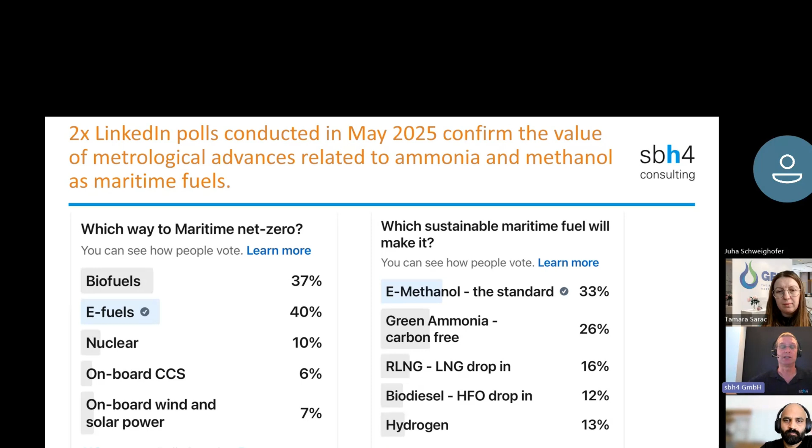And you can see across the various different characteristics why certain fuels might be more or less attractive than others. For example, I think we all know this, unfortunately, ammonia suffers a little bit from the issues related to toxicity. Hydrogen gas suffers massively from the very, very low volumetric energy density. In an aeroplane, what you want to worry about is the gravimetric energy density of the fuel plus its container. On a ship, or in a shoreside terminal, what's much more important is the volumetric energy density.

And this is really one of the unbeatable characteristics of liquid hydrocarbon fuels. Look at the energy density up here, and we might say similar for heavy fuel oil. It's just completely and utterly unbeatable, which is, of course, why we've used HFO as a fuel on ships so much in the past. And trying to say, okay, well, let's use something else, it's really only LNG that has a similar energy density, but then the problem obviously becomes cryogenic storage.

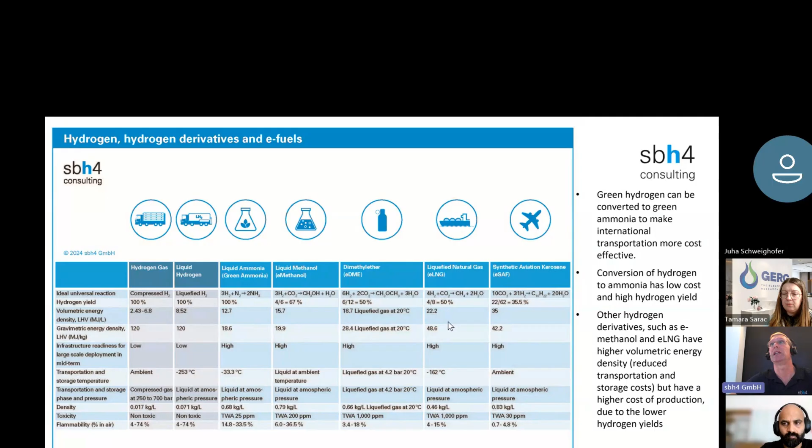Good. So let's take a look. Let's pick one of those off the list and start somewhere. Let's start with ammonia. I do believe that there will be a future for ammonia as a maritime fuel. That's a personal belief. I think it will be limited to heavily industrial applications because of its toxicity.

I think there's also a huge challenge to overcome with the seamen's union, because these are the people working on board the ship and down in the engine room who are most likely to be impacted by any toxic leaks. So it's not a slam dunk that ammonia as a maritime fuel will make it, in my opinion, but it does stand a high chance in some applications, especially industrial maritime applications. And that's where we're seeing it penetrating today: the large iron ore carriers, for example, moving between Australia and China.

But once we start saying ammonia as a maritime fuel, we need to think, okay, am I going to burn it on a gas turbine? Gas turbines sometimes operate on very modern ships, often military ships moving very fast. Is it going to be burnt on a two-stroke engine, a bit like a heavy fuel or diesel engine as we operate today? Or is it going to be used on a fuel cell?

And the quality requirements of the ammonia as a fuel differ significantly between those different applications. So the metrology and measurement requirements of those three different energy release forms will also differ significantly. Furthermore, the emissions profile from those different energy release forms also differ significantly.

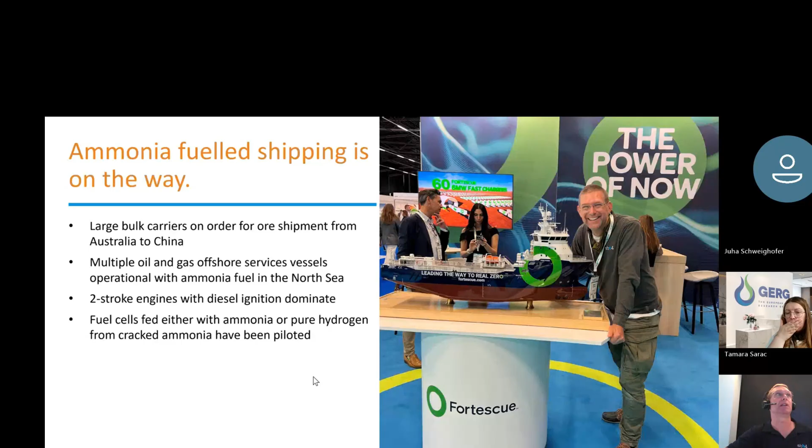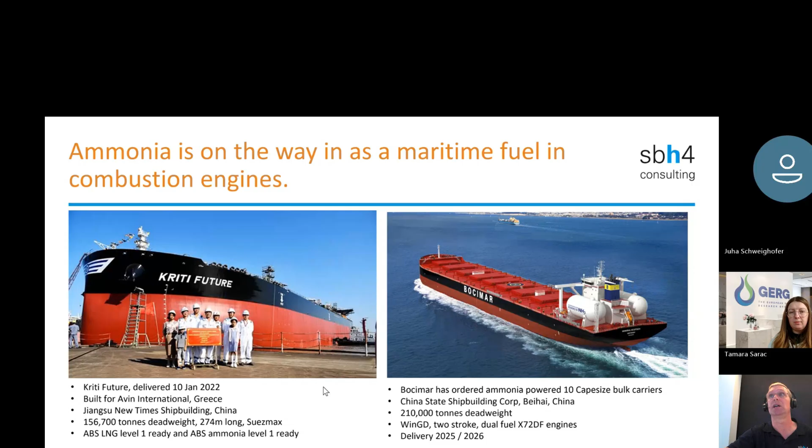So yes, we are seeing specifically bulk carriers and large petroleum refined products tankers, crude oil tankers moving towards ammonia-fired engines with a few vessels on order. In terms of how we use ammonia on a two-stroke engine, well, inevitably it will need a pilot fuel such as diesel, because the ammonia has such a high ignition energy. It just doesn't want to burn, is the truth of it. It burns with a lazy flame and it doesn't want to burn. So we need to ignite or detonate with diesel.

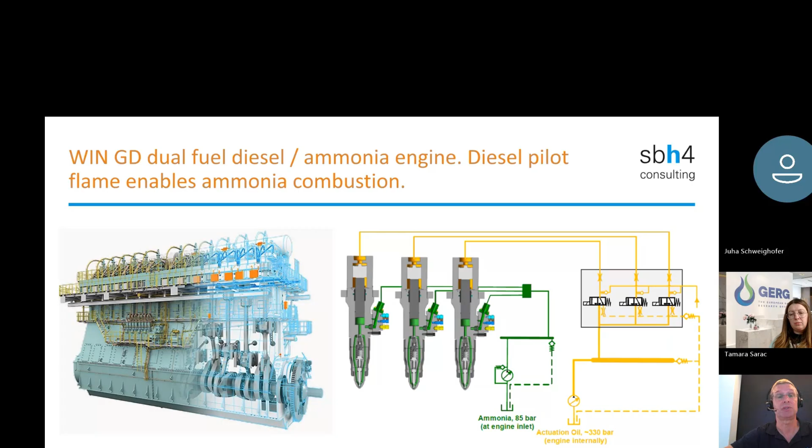And ultimately, in terms of the overall energy requirement, we're typically using about 5% diesel and 95% ammonia. And again, people need to be aware of this, that ammonia on a two-stroke engine is not a carbon-free fuel. It is 95% carbon-free because it needs to be mixed with diesel. And therefore also the emissions footprint and what you'll need to measure is a combination of the ammonia combustion and also a small amount of diesel.

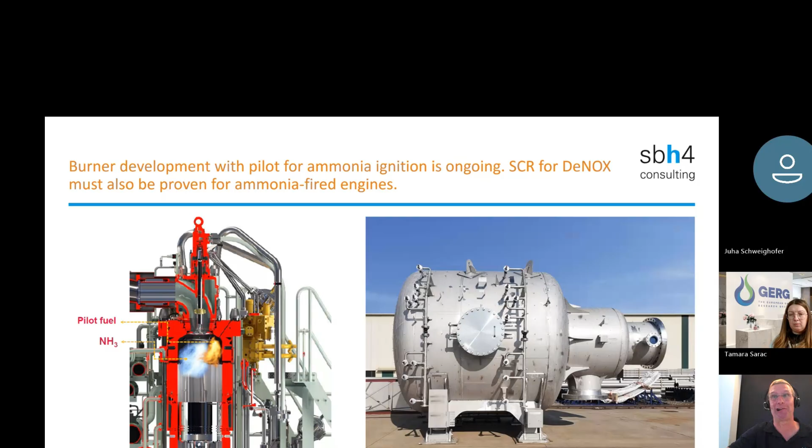Mitigation in terms of scale and size, I mean, this is an SCR, a selective catalytic reduction unit from a maritime vessel. So, when we talk about scale and size of operations and emissions mitigation, let's not forget some of these big ships burn a lot of fuel and potentially create a lot of NOx emissions which need to be mitigated. Just wanted to throw that one in for you there. We're not talking about small DeNOx systems that you might put on the back end of a car or a truck. These are monsters.

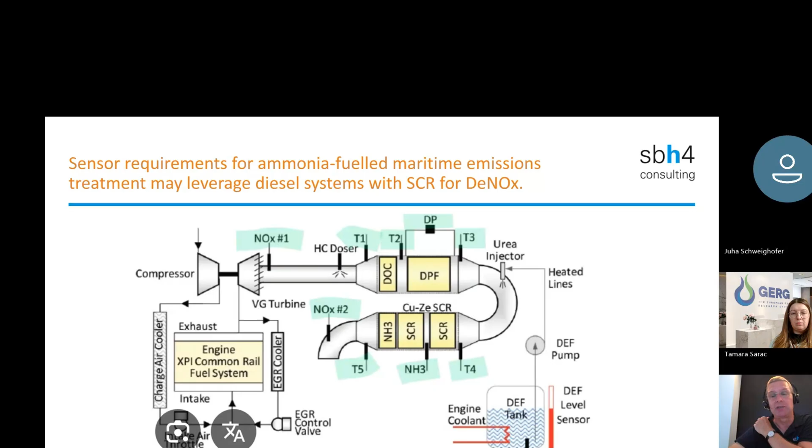But talking about car and truck, I think we can lean on what has been done in cars and trucks with regard to ammonia emissions monitoring and process control and sensors to imagine how the world of maritime ammonia use might evolve. And here's really just a reminder that a truck ammonia DeNOx system based on diesel fuel is full of sensors. And in a large-scale environment, some of those sensors would need to be replaced with more accurate gas analyzers for emissions monitoring. So there's a lot of work to be done, a lot of metrology to be done around process control, feedstock purity measurement, which we don't measure in the truck, and also the emissions monitoring.

Good. Let's stay with ammonia, and I'm now going to go through to look at cracked and partially cracked ammonia as a maritime fuel. What do we mean by cracked ammonia? Well, a lot of the time when people talk about ammonia cracking, they're talking about very, very large port-side crackers. So moving large quantities of ammonia around the world from where it's cheap to make it to where it needs to be used in large quantities and cracked back to hydrogen and then perhaps put into a hydrogen pipeline.

And on the left, we've got there a very, very large ammonia storage tank and the kinds of ships that will move large cargoes of ammonia around the world. And on the right, you've got two models of ammonia cracking. One here, a centralized model where it's cracked centrally and then perhaps the hydrogen is distributed. And a second model where the ammonia itself is distributed and then cracked, let's say, at the point of use.

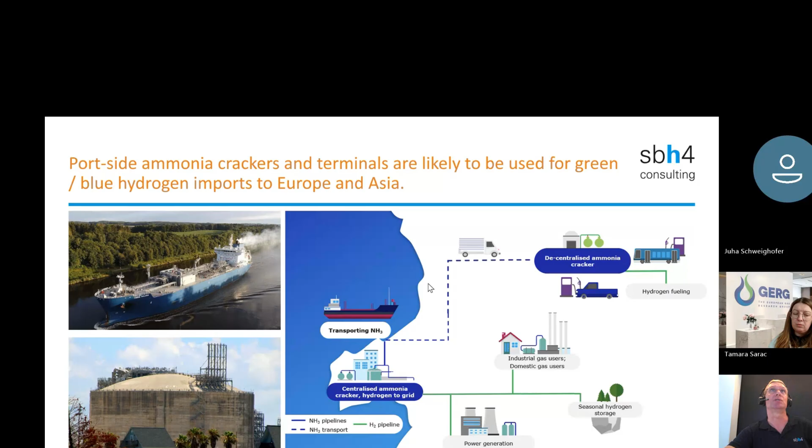Either at a chemicals plant where they want to burn the hydrogen or a chemicals plant where they want to use the hydrogen, or on board a vehicle. I don't actually ever see that it's going to go on board buses. I'll be very, very clear. I also don't see that it's ever going to go into cars, but it could easily go into other vehicles and industrial applications.

So what does an ammonia cracker look like? Well, they're all different, to be very honest. This is a particular example from Johnson Matthey. So I suppose this is going to be Honeywell UOP in the near future, if you've been following the news. But basically, the heat for the cracking is provided in this particular configuration by burning some of the ammonia. There are other configurations where the ammonia is cracked, and then some of the hydrogen at the back end is used to create the heat inside.

But whether we're burning the ammonia or the hydrogen to create the heat, again, we have lots of metrological requirements simply for ammonia cracking. Because this cracker burns a lot of material to create the heat, we have a lot of flue gas emissions, so we have an emissions monitoring responsibility. And of course, there will be process control sensors and analyzers within the process to make sure that the cracking is happening well, that we've not got a lot of ammonia slip coming through the cracker, and various other key process parameters.

Furthermore, the ammonia coming into the cracker is of critical importance because the cracker contains a catalyst which is very, very sensitive to certain poisons. So it will also be necessary up front of the cracker to be measuring for certain impurities such as sulfur compounds, which shouldn't be in the ammonia, but they might have entered the system through some failure upstream. So on the inlet, process control, emissions monitoring, and the hydrogen coming out, there are metrological requirements throughout the ammonia cracking process. Some related to quality control, some to process control, some to environmental emissions monitoring.

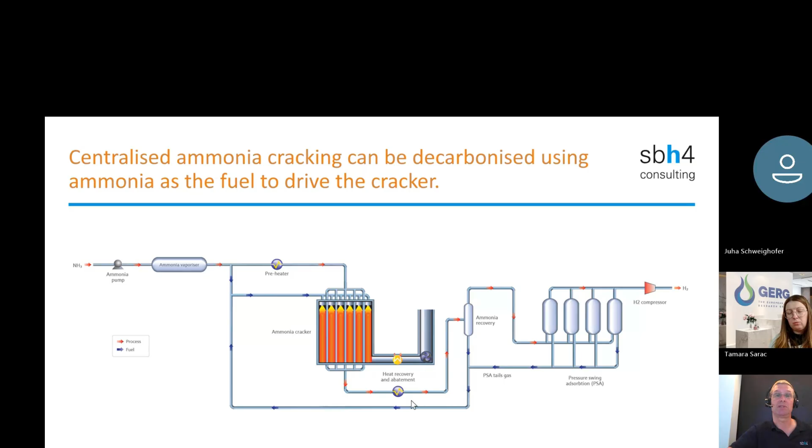If we then think about ammonia cracking on board the ship or inside a truck or a train, it's very similar technology at much smaller scale. So this is an example of a maritime two-stroke engine proposal, where we have our cracker here. And you might notice that this is partial cracking. A lot of the ammonia bypasses the cracker and goes directly into the engine, and typically 10, 20, 30% of the ammonia would be cracked. But clearly, if we're just burning the raw ammonia, we would have the emissions issues we discussed previously. If I'm cracking 10 or 20% of the ammonia, I have additional process control sensors and measurement requirements inside the cracking loop as well. Plus, don't forget that the ammonia can actually be going into the exhaust to provide deNOx afterwards.

This is an example actually from an aviation turbine, but I would just remind you that some very fast ships actually run gas turbines instead of two-stroke engines. It's less common, but especially in military, defense applications, high-speed ships, it is actually quite common to be running a gas turbine. So we might actually see ammonia going onto gas turbines on board ship.

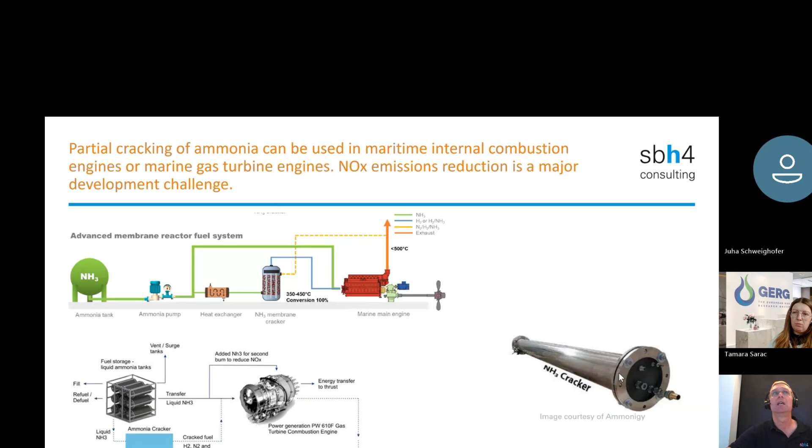At these smaller scales, it could be quite large if it's a ship, but this cracker here has come straight out of a train where ammonia is being cracked to go onto a diesel locomotive engine. This is effectively what a small scale cracker could and would look like. This particular one is from a German company called Ammonigy. I don't know if there's anybody from Ammonigy on the call today, and if you are, hello. And really just to give you an idea of physical dimensions.

We can also go a little bit further. We can crack the ammonia and then put it onto a fuel cell. This is not internal combustion. This is now a fuel cell, whether it's a high temperature fuel cell, solid oxide, high temperature PEM, or low temperature PEM. But I really just want to point out that if we're coming away from a two-stroke engine or a gas turbine with those particular combustion profiles into a fuel cell type operation, whether we crack or not, we're going to have a very different purity requirement coming into the fuel cell and a very different emissions footprint coming out of the fuel cell.

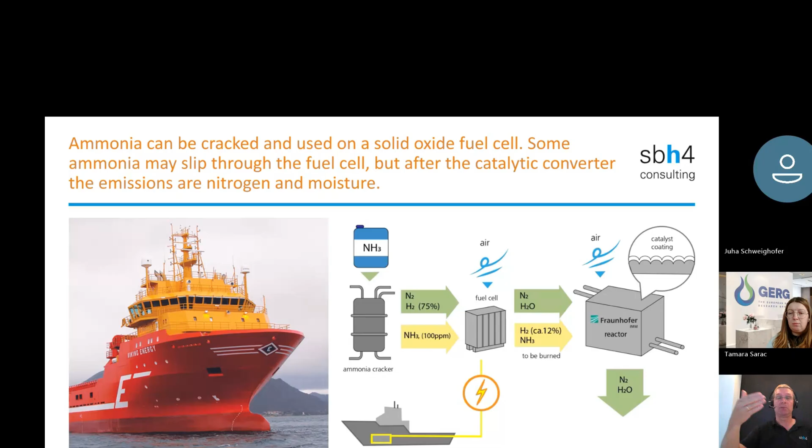Repeating what I said earlier on, it's not just the use of ammonia as a fuel that you need to consider for your metrological requirements. It's that matrix of which fuel and which, let's say, powertrain system, turbine, two-stroke, fuel cell, and even within fuel cells, there are all sorts of different dimensions.

And even within PEM fuel cells, you've got high temperature and low temperature with very, very different tolerances to impurities. So the metrological requirements or the purity measurement requirements coming into the fuel cell for PEM is a very high hydrogen purity. Coming into a high temperature fuel cell, much more relaxed. So again, even there, coming into a PEM fuel cell, there are two different types with two very, very different requirements on hydrogen purity coming into them.

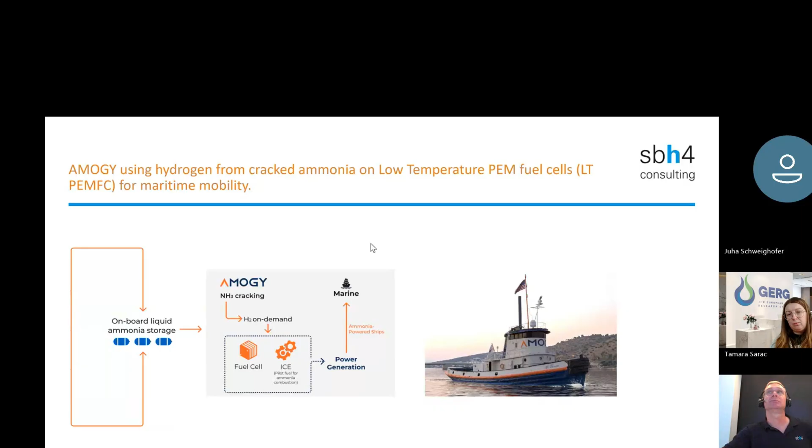This is another onboard case. Actually, the ship wasn't powered by ammonia. This small utilities power generation system at the back was powered by ammonia. This is an H2SITE ammonia cracker with integrated hydrogen membrane.

But again, these kinds of systems, what's going to make it through to the end game, I think, is still very, very much open. But the more you understand about the types of systems that are being researched and proposed, the more relevant your research and metrological work that you're doing will become ready for the future and be much more future-proof.

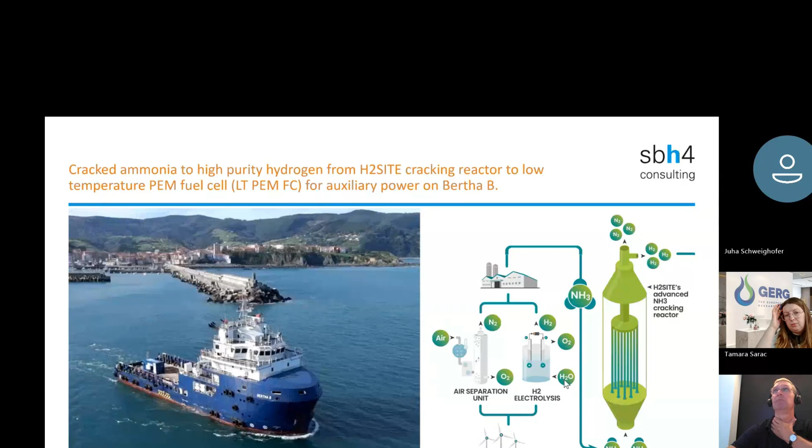Here's again ammonia fuel cell systems. Whether or not you know it, there are 8 of these vessels that were ordered for a Norwegian company, and they're being built in Vietnam. So, if people ask you, was that Fortescue Green Pioneer ship the first ammonia-powered ship? The answer is no. They might tell you it is, but it's not, and it wasn't.

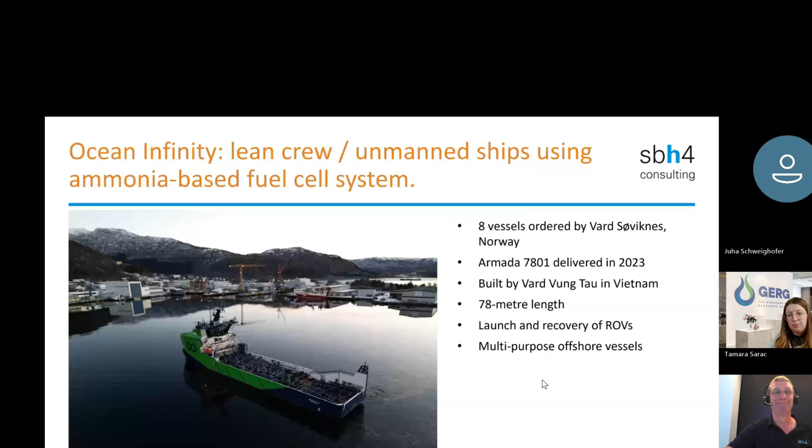Good. Ammonia for power generation. So we're coming away from maritime applications now. We're staying with ammonia, but we're looking basically at power generation on land. Clearly, I think we're all quite aware, we need to, in the future, over time, burn less coal, burn less heavy fuel oil for power generation, move much more through to a renewable world.

And the difficulty being, coal-fired power generation, base load, relatively easy to manage supply and demand. Renewables, typically non-programmable and variable. So as we move through to a higher percentage of renewables in the grid, what we need to also add on is, let's say, power or energy storage that complements the duration of intermittence or variability.

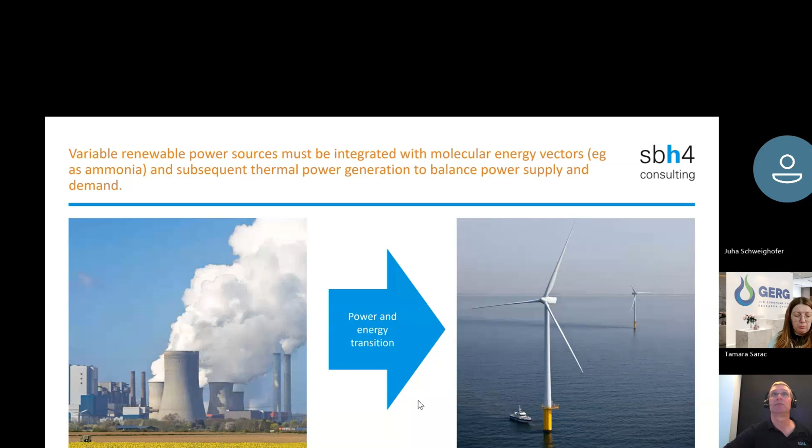And when we think about electricity storage or energy storage, we really need to think about the storage capacity. How much are we trying to store? And also the discharge duration. Am I trying to discharge over a second, a minute, an hour, a day, week, month, or am I trying to get seasonal balancing? And there's a lot of technologies for short timescales, small amounts, and a lithium-ion battery is fantastic, really good technology, very, very high round-trip efficiency. If we want to discharge for, let's say, 4 to 6 hours, brilliant.

But if we want to store energy for a week, a month, or a year, then lithium-ion batteries are just absolutely useless. The business case completely and utterly fails. And we need really to think about molecular energy storage. So I talk here about underground hydrogen storage, underground gas storage, or we talk about conversion of the hydrogen to, let's say, ammonia or methanol.

My point here being, when people talk about battery energy storage and say, well, that's going to be the thing, I'm kind of going, it's going to be one of the things. Yes, and it is brilliant. Round trip efficiency, unbeatable. But if we want longer discharge periods, we really do need to think about molecular energy storage.

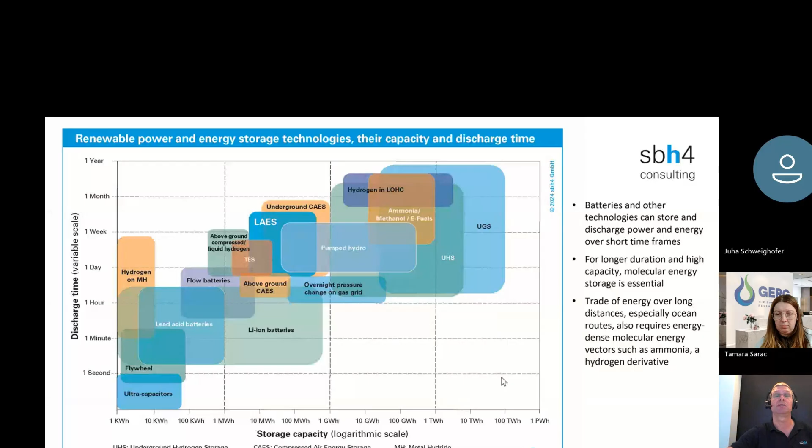So I've just seen a question come into the chat. Hi, sbh4. My name's Steve, by the way. Have you taken LCA of different fuel pathways into account? Only blue-green makes business case. Okay. Have I taken LCA into account? I'm not presenting LCAs today. And you're expressing an opinion there, I believe. Only blue-green ammonia and MeOH makes business sense. If that's your opinion, that's absolutely great. Lovely to hear it. Thank you. Again, also, I'm not presenting business cases today. But thank you for the comments.

Here's a study that was done specifically for the UK. It was a General Electric and an IHI study. I mean, GE do turbines and IHI do burners. And this was really comparing liquid hydrogen versus ammonia supply chains, portside power generation, right? So this is a little bit similar to that cracking case that we looked at previously.

The message of this particular study was that liquid hydrogen is less economically sensible or less economically viable than ammonia. Okay, so again, if you're trying to justify why you're looking at ammonia emissions and not other emissions cases in your metrological projects, here's one good reference point to establish that.

Again, I'm going to go through these slides very, very quickly. You don't need to sort of try and understand all of the numbers that are on these particular slides. You've got the slide decks, and also if you look here, the links through to the more detailed studies and analysis. So you can do a lot of research after the call today.

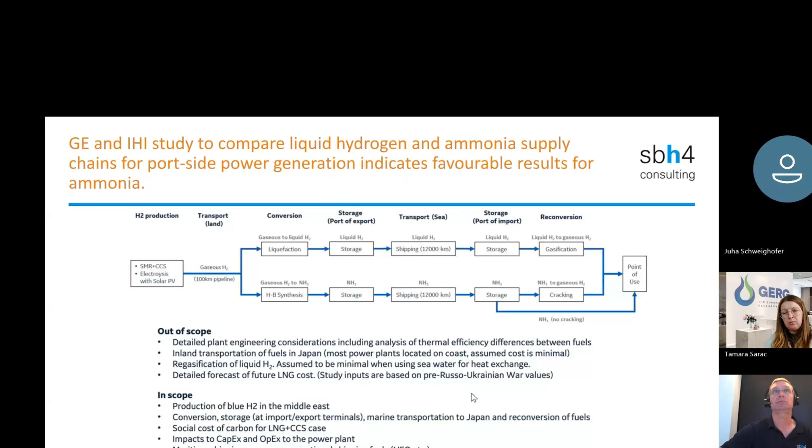When we think about the efficiency of ammonia-fired power generation, I think the benchmark is really going to be natural gas, so natural gas combined cycle, where we basically use the natural gas through a turbine to generate power. Then the steam that we generate is also going through a second steam turbine, so we get 2 hits of it, right? So we can get really, really high efficiencies on a combined cycle. If we go open cycle, we just get the first half. If we go combined cycle, we get the second half as well.

And if that's the benchmark, because that's what we're doing today, natural gas, the question really is going to be, can ammonia deliver anything similar? And the answer is yes, we can get similar, in the sense that natural gas combined cycle sort of efficiency typically plateaus out around 58%, and we can perhaps get as close as 55%, 56% using an ammonia fueled combined cycle, right?

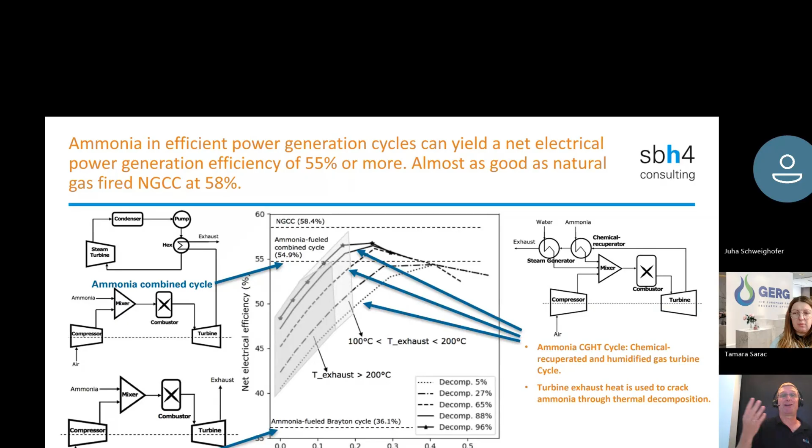So if anybody's asking, can ammonia ever get close to natural gas in terms of process efficiency? I would say yes, we can get close to it with an intelligent cycle. And if you're running, let's say, natural gas open cycle, then we can beat that dramatically with ammonia on a combined cycle. So yeah, it really depends on the cycle efficiency.

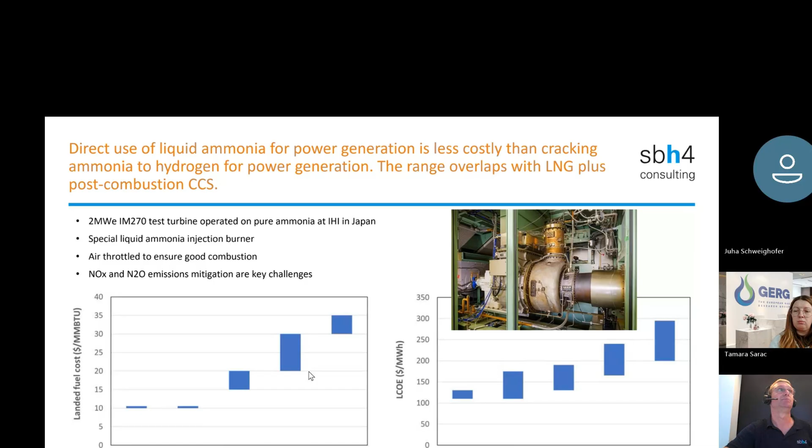I also ran a poll on my LinkedIn profile related to ammonia to power recently, and basically asked the question, will it ever be used? And if it is, how will it be used? And you can see the answers here, and yeah, there's a slight majority of people saying no, it won't, because of various different reasons. Either it's too expensive or the NOx emissions can't be resolved.

But a good number of people basically saying yes, it will, and broad consensus that it would potentially be used on turbines and gensets. So gensets is basically 2-stroke engines. So again, these kinds of information I think can be quite relevant for you to think about what kind of metrological projects you take forward. I've got another.

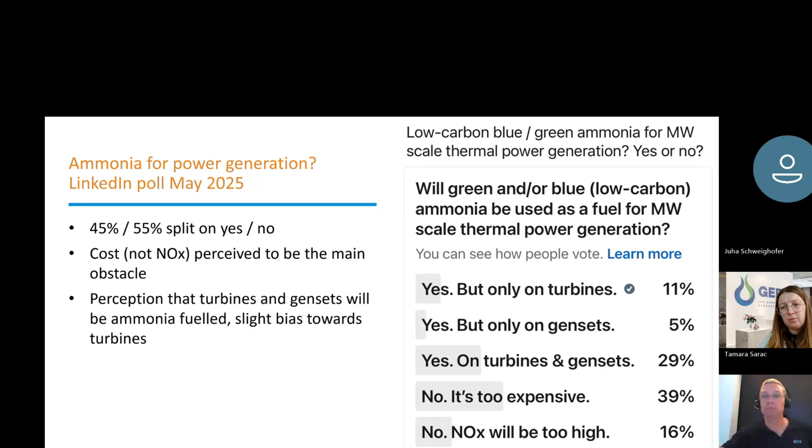Good. So that was basically ammonia for power generation. And I'm quickly going to look at some of these slides related to co-firing, because we don't need to fire pure ammonia. There were a lot of studies done in Japan, basically co-firing ammonia with diesel on a microgas turbine, and you can see here some of the results there. My point very simply being, we go ammonia plus diesel, integrated fuel use, a bit like the diesel pilot on the ammonia 2-stroke engine on the ship.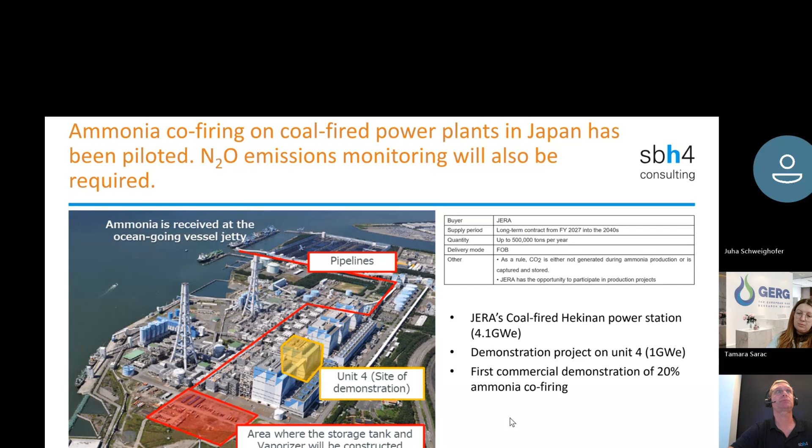And again, exactly how you take your studies and evaluations forward, I think, is really going to depend on where and in which parts of the world you believe these various different combustion ideas will prevail. In terms of doing that ammonia co-firing, a lot of changes needed to be made to the burners. Nothing else really was changed, but specifically the burners inside the combustion chamber to allow the ammonia co-firing.

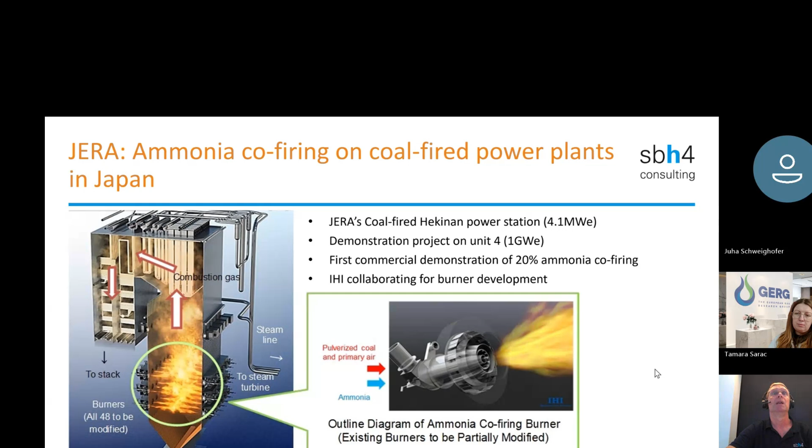All right, so I've got another question here from Florian. Hello, Florian. Could you please elaborate on the topic of NOx? Okay, good. Let's take a look at NOx, right?

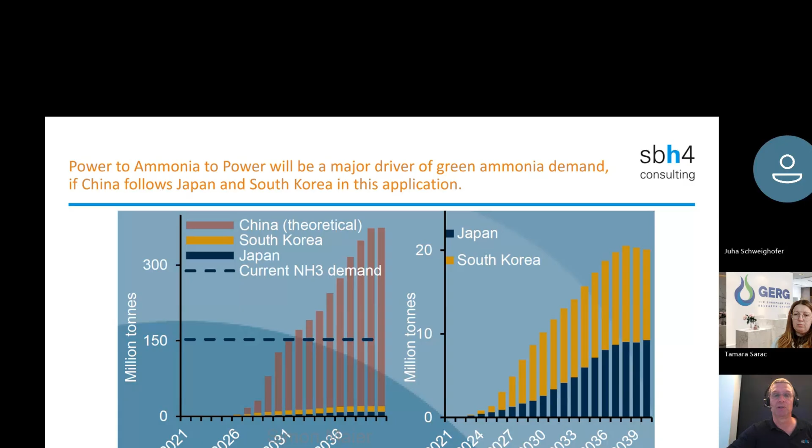Again, I'm going to go more into NOx on turbines rather than NOx on diesel. But ultimately, you'll still need to do DeNOx if you're firing ammonia, just like you need to do DeNOx if you're firing diesel. The good news about DeNOx with ammonia firing is you've already got ammonia on board to do the SCR.

All right, let's take a little bit of a deep dive into our emissions monitoring. We're probably not going to have much time to look at methanol today. Poor old methanol, a bit unfair, but I just really want to give you a flavor of some of the information that I've got in the deck here. Let's go straight through into the emissions monitoring now.

And I think for me, the difference between the future and the past, when we start burning ammonia as a fuel, is in the past, we've often worried about NO and NO2, fine and fair, and we've bundled it together as NOx. And I think that's going to have to continue. No way that's going to stop. My concern is that, if we're not careful, we're also going to get N2O coming through, nitrous oxide.

And if the whole reason for displacing a hydrocarbon fossil fuel with ammonia is to reduce greenhouse gas emissions and reduce CO2 emissions, if we substitute those for nitrous oxide emissions, then we've lost. Because nitrous oxide is around about 250 times more potent as a greenhouse gas than CO2 per kilogram, right? So if we end up with an ammonia-based combustion system with a lot of N2O emissions in it, we've lost, okay?

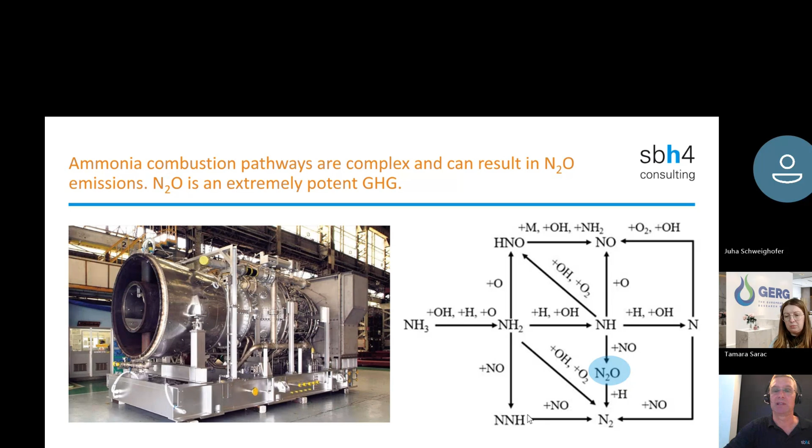And N2O, why would we end up with N2O? Well, basically, if there's not enough oxygen there, is fundamentally the answer. As soon as the oxygen comes there, then we can go through to higher oxides of nitrogen. But these reaction kinetics are pretty much instantaneous. These things don't happen slowly. This is all happening instantaneously within the combustion chamber.

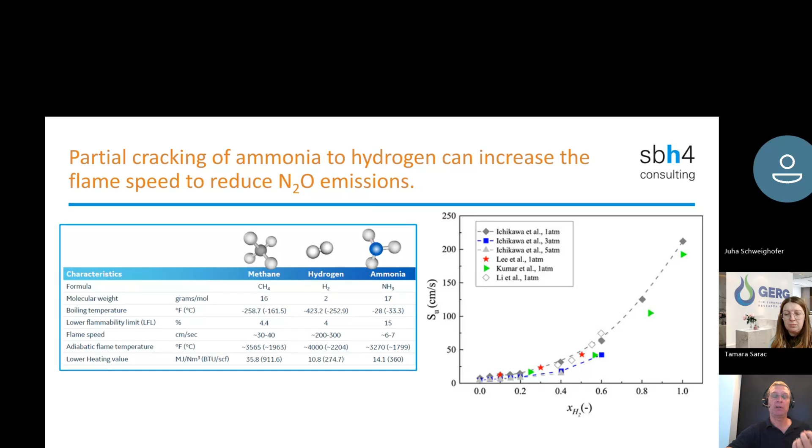And we can see, through various different studies, and again, please download some of these references, if we partially crack the ammonia, then we end up basically with a flame speed and flame characteristics that look a lot more like methane. So by partially cracking the ammonia, we can basically create combustion conditions that are much more similar to what we know a lot about methane or LNG.

And what people have realized is that, people sometimes call it lambda, or the reciprocal of lambda is the fuel air equivalence ratio, or phi. Is this phi? I'm not very good at my Greek characters. But basically, if we want to get the N2O down, and please remember this is nitrous oxide now, N2O, not total NOx, not NO, and not NO2, but specifically N2O, then we need to be working in a relatively tight band of lambda, of the fuel-air or the fuel-oxygen ratio.

And what that says to you is a couple of things. Number one, we can avoid, to a large extent, N2O emissions. Good news. We also need to control the engine combustion, the fuel-air mixture, in a relatively tight band, which means that the sensors and the metrological requirements to achieve that need to be pretty good. Rapid response, pretty accurate. So again, in terms of the metrological requirements, you're beginning immediately to see what kind of process control sensors the engine would need.

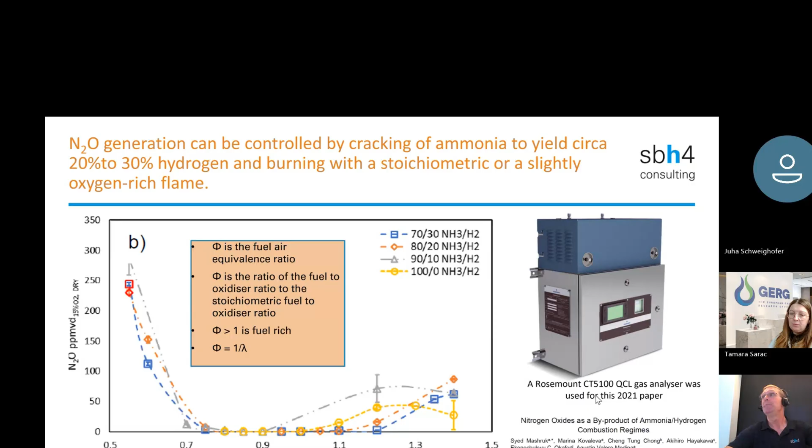And at the back end of the system, we're probably already measuring NO and NO2, combined NOx, on a chemiluminescence analyzer, great. Who's going to measure the N2O to make sure that that is not coming through as well? That's going to need different emissions monitoring and measurement sensors and technology. So, what have people used in the past? Well, QCL, quantum cascade lasers, you people would know all about this much better than I do. But that's what was actually used in this particular paper to measure the N2O.

And then we say, all right, so where in the past have we actually looked for N2O measurements and international standards? There are some industries where the N2O emissions are incredibly high, typically making nitric acid fertilizer, for example, where we burn ammonia intentionally to make oxides of nitrogen. I don't actually really know whether those measurement protocols are going to be relevant to emissions monitoring because the nitrous oxide concentrations are so much different. But I'm sure you also know the CO2 and N2O peaks broadly overlap in the IR spectrum.

I'm trying to tell you things in a very naive way that I'm sure you know a lot about. But I'm really just trying to make the point, can we leverage existing metrological standards from other sectors into what we're trying to do with N2O emissions monitoring? I don't know. Do we understand some of the problems with regard to CO2 and nitrous oxide peaks overlapping, which is very relevant? We've got a blended hydrocarbon fuel plus the ammonia. How can we deal with those? How can we learn from the past to accelerate an effective system for the future? That's what I'm trying to get through to you here.

So I can see another question coming through. Tobias Eriksson, hello Tobias. "Hi Stephen, do you have any slide about analyzers for ammonia slip and nitrous oxide?" Okay, good. Let's keep going and let's see if we do.

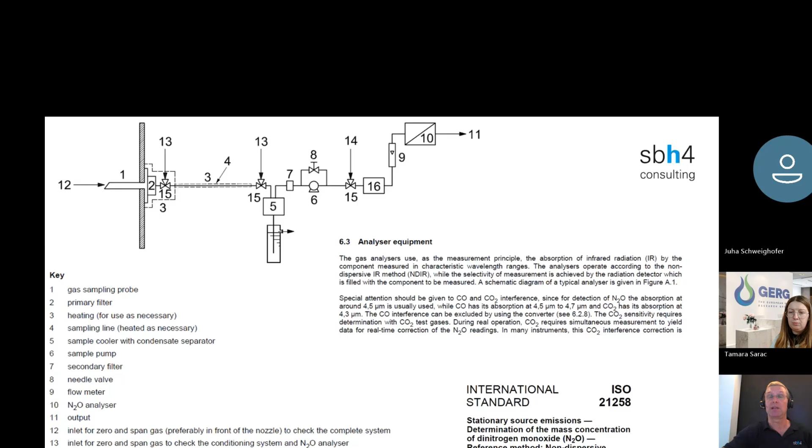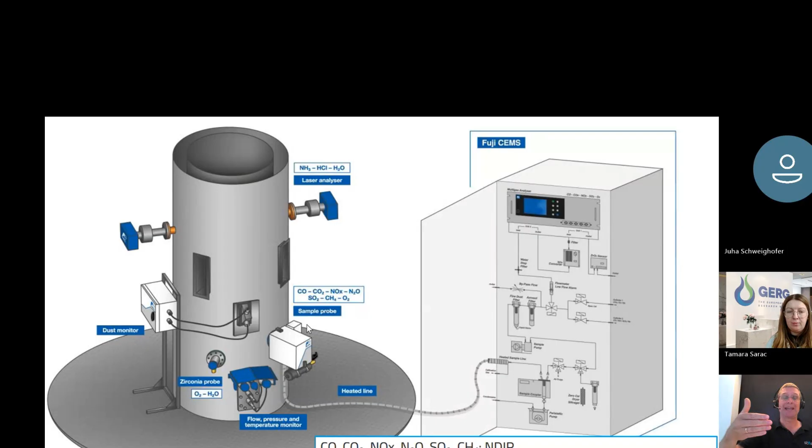So again, I'm really addressing the point of N2O here because I believe that most people are quite familiar with how to measure NO and NO2. You've seen the quantum cascade laser. Here's another slide, which is basically looking at a Fuji CEMS using NDIR, non-dispersive infrared, I think I said that right, to look at the N2O and also the NOx separately, different IR spectra, and also how you compensate for the CO2 peak overlapping with the N2O peak needs to be dealt with. This is a classical flue gas emissions monitoring setup, but I think certain aspects of this can come directly into maritime emissions monitoring.

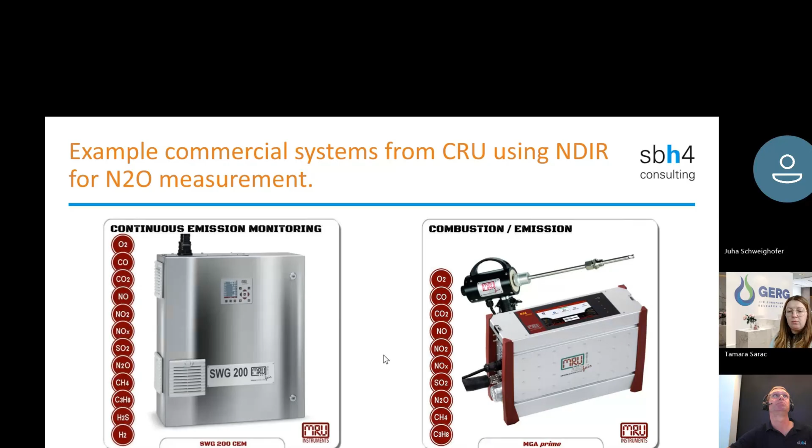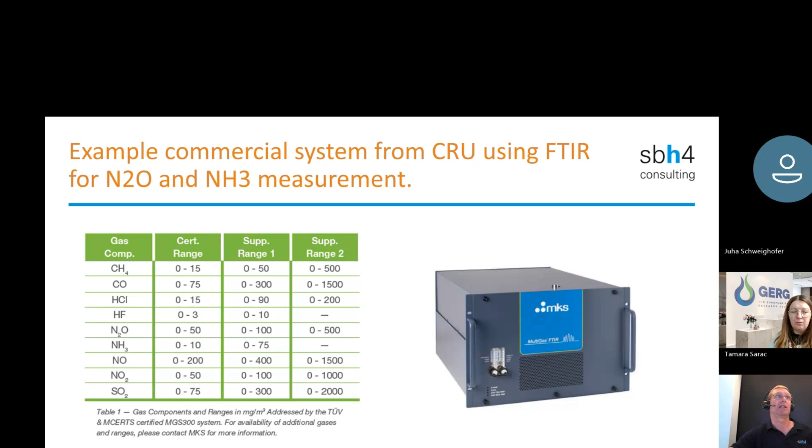N2O on FTIR, again, FTIR, whether it's going to survive on a ship, I'm not entirely sure. Ships tend to be high vibration, very, very unstable environments. FTIR really works incredibly well in the lab, but whether or not for validating certain standards FTIR would be a good case would really be the kinds of things that people like you should be trying to decide upon and make recommendations to the world about. But again, FTIR can be used very, very effectively, specifically for N2O and ammonia measurement.

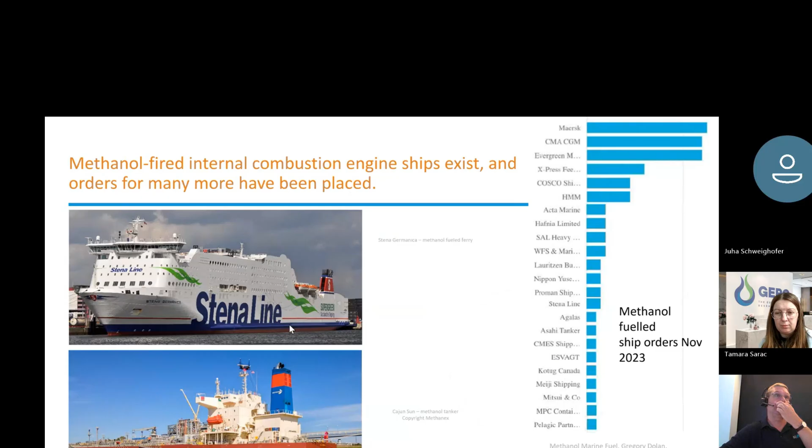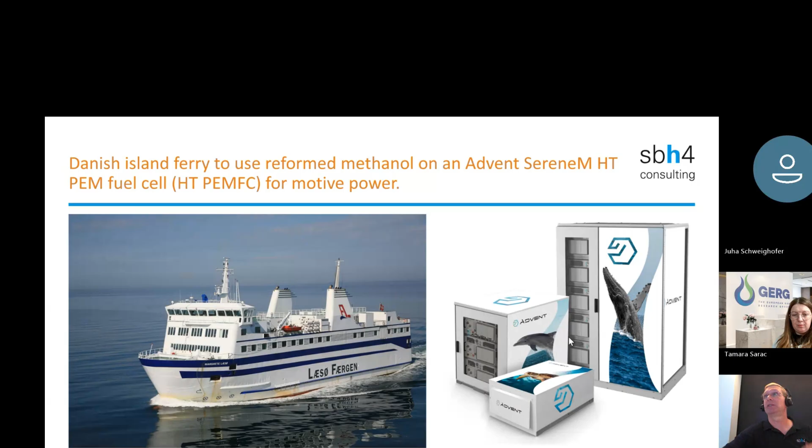And again, these examples here are methanol basically on a two-stroke engine, like a diesel engine. This example here is slightly different. This is methanol being cracked and then going into a high temperature PEM fuel cell. Now, high temperature PEM, as I mentioned before, is much more resilient to, let's say, impurities or non-hydrogen species coming into the fuel cell. Advent and others make HT-PEM fuel cells.

Come away from maritime and talk about methanol on land for power generation. A lot of studies were done about 20 years ago related to the use of methanol for power generation, because the idea was to go from natural gas to methanol and then burn the methanol. When people realized that LNG could do the job for them, the case for methanol decreased. When the gas crude price spread moved in favor of crude, again, the need for this particular technology decreased. But there has been a lot of work done and forgotten about methanol for power generation.

And again, you can go through some of these older research papers and learn a lot about it to understand what the emissions footprint would be, what the efficiencies would be, whether or not it ever stands a chance of coming back into the world and displacing or competing with ammonia, with renewables, with anything else that you might choose to mention.

Okay, there's some really, really useful input from Marcus Haas. Thank you very much indeed for that insight, Marcus, and I hope everybody's got their eyes on the chat. Endress+Hauser, SICK GmbH, has a class-approved analyzer to measure N2O and ammonia as well. Okay, fantastic. That's exactly the kind of information that's really, really good to get you sharing amongst yourselves. Thank you for that input, Marcus.

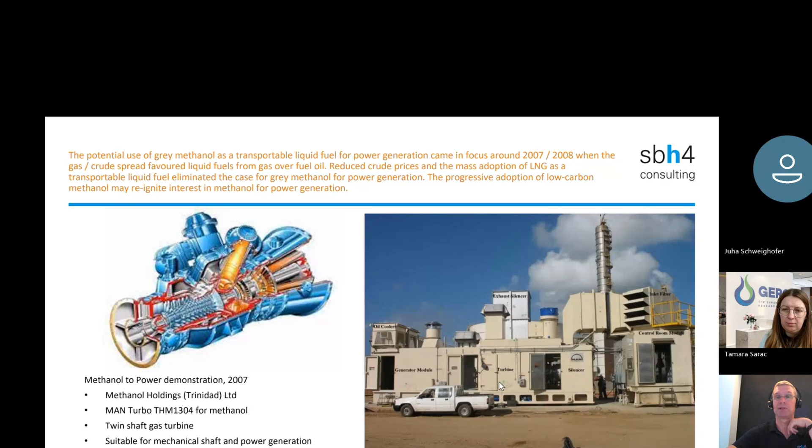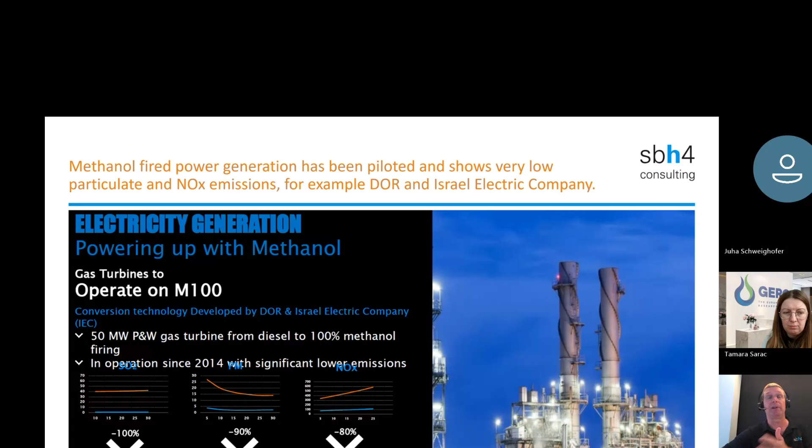Here's another case study. This is firing methanol on what I refer to as a gas turbine, or a two-stroke type engine, with a lot of benefits in terms of reduced particulate emissions, reduced NOx. This was done by Dor in Israel. But really, if you read this kind of information, you'd go, why would I use anything other than methanol? So please again, look at what's been done, look at some of these references that I'm giving you to leverage the past in terms of directing your research in the future.

Coming back to fuel cells, this is a direct methanol fuel cell, DMFC, very suitable at very small scale. It begins to get uneconomical at larger scale because you need so many precious metals in the membrane. If you go larger scale, you really want to put hydrogen onto your fuel cell. If you stay small scale, then you can go direct methanol. But again, something like this, you'd want to be able to measure the purity of the methanol. So you'd want to validate the purity of the methanol through the supply chain.

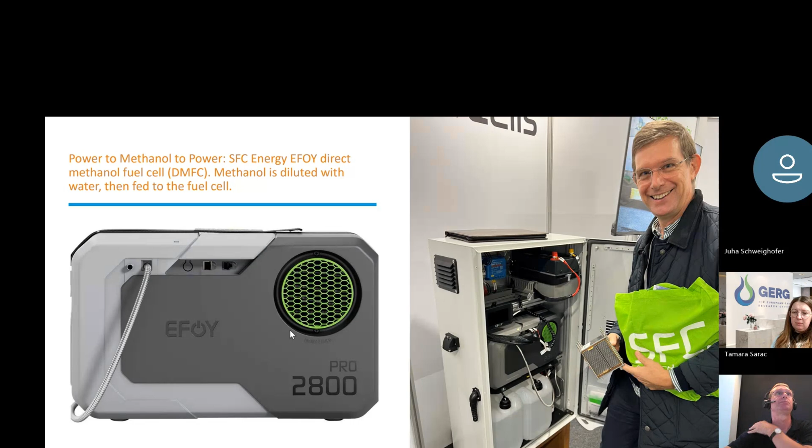Emissions profile coming off something like this, relatively benign, you would hope. But I'm really just wanting to underline what I said before. It's not just about the fuels, it's also about the powertrain. And that's really going to determine the metrological requirements coming into and out of the system. Siqens, this is again high temperature PEM, similar to what we looked at for Advent. Again, much more tolerant of impurities coming into the fuel cell.

Let's go upstream now. We've talked a lot about utilization of methanol or ammonia, so how it's burnt or used on board a ship or on land to make power. Let's go upstream and ask ourselves, what about the metrological requirements as these new fuels are being made? We're making e-methanol, synthetic methanol from green electricity, in Kasso in Denmark today. This photograph is about a year old from when the site was under construction. These are the Siemens Silyzer PEM electrolyzers in these various houses here. This facility is now up and running.

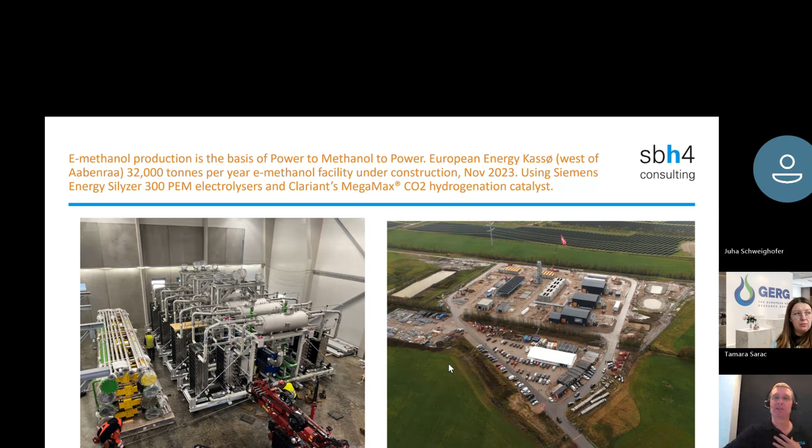So as you build a new methanol production facility such as this, of course, there are process control requirements on site to make sure that the process is well managed, the product quality is under control, and if there are indeed any emissions from the site, which there are, they are also monitored. They'll be very similar, frankly speaking, to the way an old methanol process has been operated in terms of process control requirements around the methanol synthesis loop, what needs to be measured, the concentration that it needs to be measured. So I don't see massive differences in the metrological requirements as we transition here.

Similarly, a lot of cases in China are using what's referred to as recycled carbon. So this is not biogenic CO2 and green hydrogen. This is CO2 that's been captured from an industrial process, probably a petrochemical process such as ethylene oxide production, where the CO2 is not biogenic, it's recycled fossil CO2. But doing something like that means that we use the carbon twice before it gets emitted. So there is a CO2 emissions reduction. But again, I don't really see the metrological requirements as we shift that methanol production technology being particularly different to what we would have needed in the past.

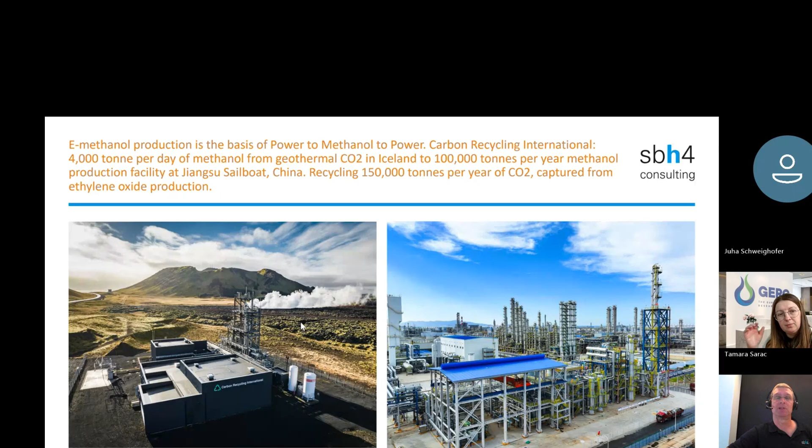So there we go. We've looked at utilization on board ship. We've looked at utilization for land-based power generation, and we've looked at various powertrain systems, burning it, turbines, fuel cells. We've looked at the process control and emissions-related metrological requirements, and then we went upstream to ask whether or not a lot is going to change as these new fuels are produced. My answer on that last one is no, but my answer on the utilization points is absolutely. And it's much more complicated than just asking which fuel, whether it's methanol or ammonia. You really need to dive into each particular powertrain and combustion system. Pure ammonia combustion, ammonia plus diesel, cracked ammonia, etc.

And as I've said previously, for me, one of the main concerns that we get our heads around going forward is N2O, and the risk of N2O emissions being a new risk in comparison to what we might have confronted in the past using, let's say, hydrocarbon fuels and then selective catalytic reduction.